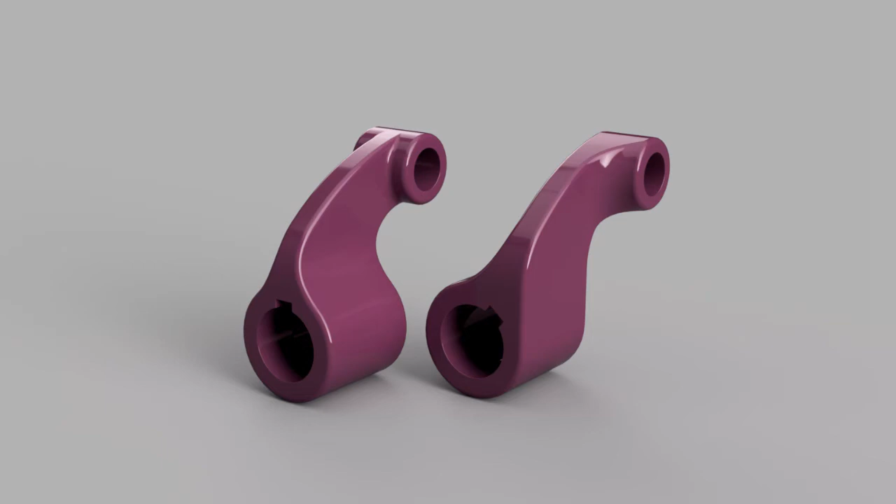Today, we are going to take up the challenge of Model Mania year 2007. Let's get started. I'm going to head up and select this plus button to create a new design. Let's grab and inspect the 2D drawing.

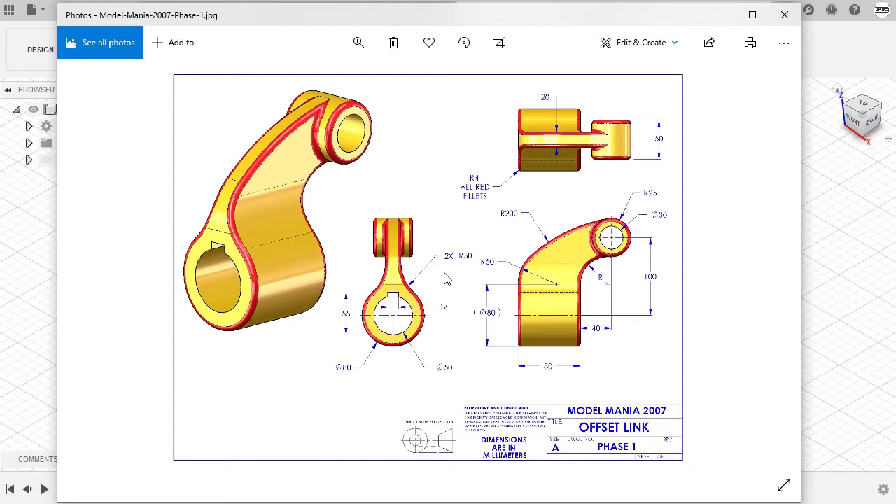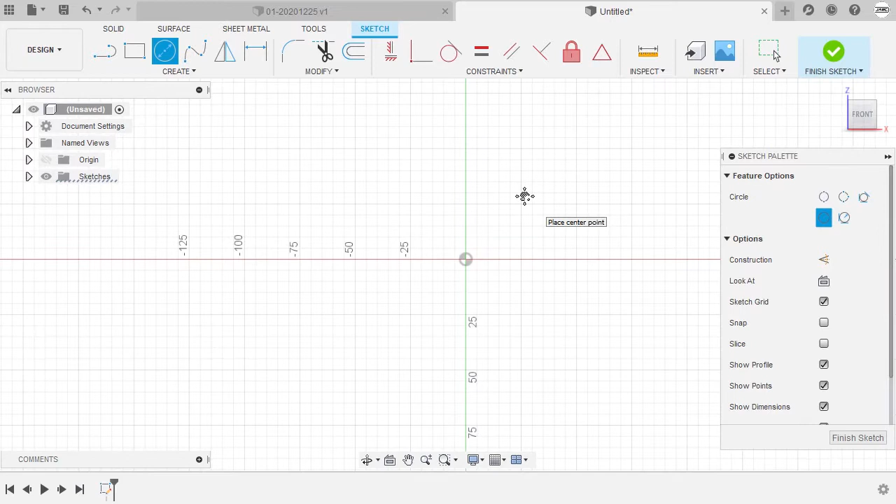Let's focus first on this feature and initially create a circle with 50 millimeters diameter. Let me hit C for circle and let's sketch on our XZ plane, selecting this. Let's drop our center point at the origin, left click. The diameter to be 50, hitting enter. Let's move the dimension here.

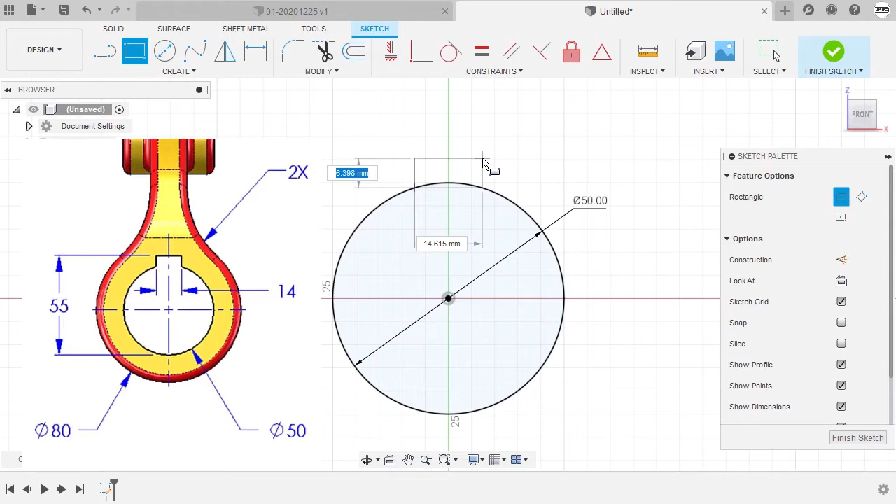Let me zoom in. Next, I'm going to hit R for rectangle and create the rectangular sketch here. And let's dimension this, hitting D for dimension, selecting these two vertical lines. The value to be 14. Let's select this top horizontal line. Next, I'm going to right click and select Pick Circle Arc Tangent.

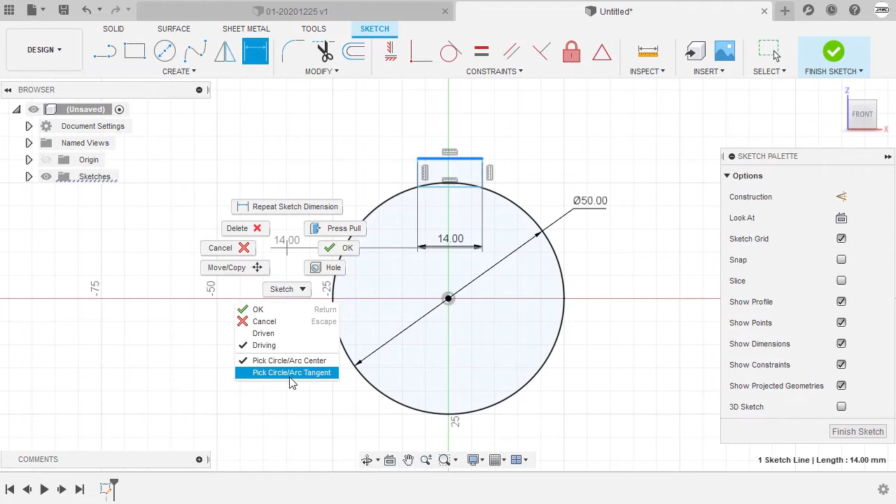I'm going to hold Shift. So notice the X mark. So once more, holding Shift, left click, and move to the left. Placing our dimension here, left click, and key in 55. Selecting enter, hitting escape.

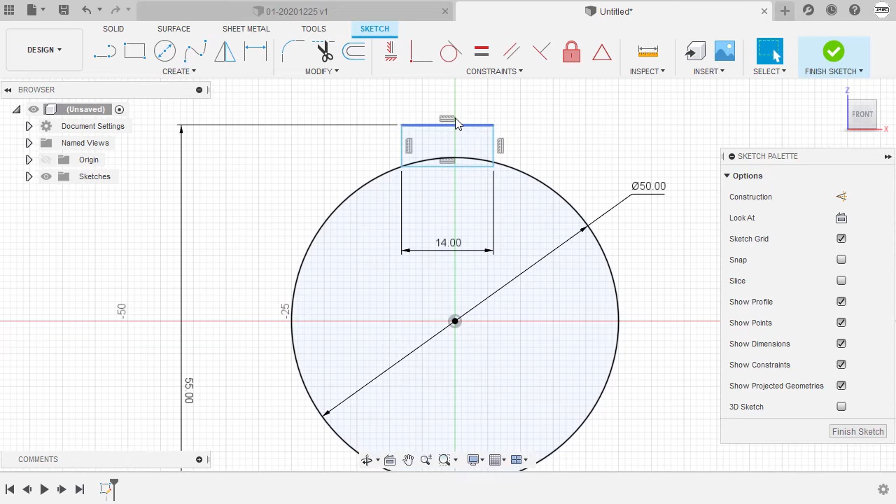Next, I would like to grab our horizontal vertical constraint, hold shift to locate the midpoint of this horizontal line, holding shift. So notice the triangle, left click. Next, I'm going to select our origin as well, left click here, hitting escape. And as a personal preference, let me turn this horizontal line into a construction line, selecting this.

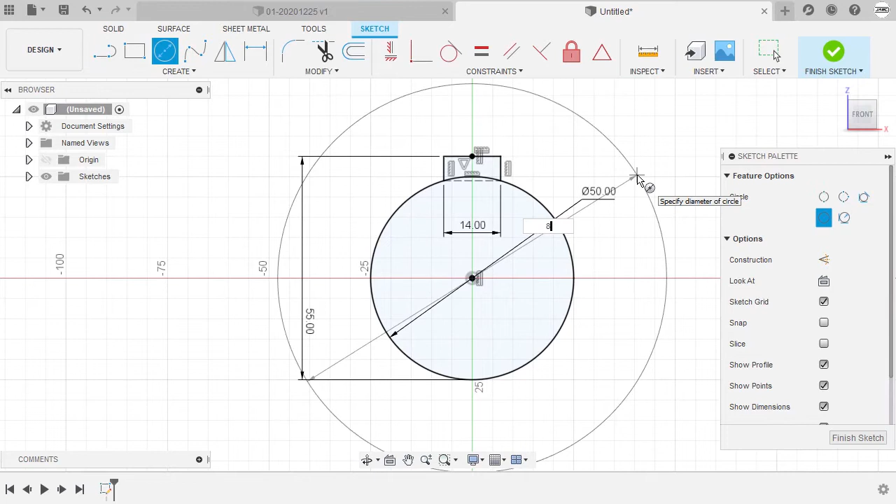And finally, let's create the 80 diameter circle, hitting C, dropping the center point at the origin, and keying in 80. Hitting enter. Let's move these dimensions over here.

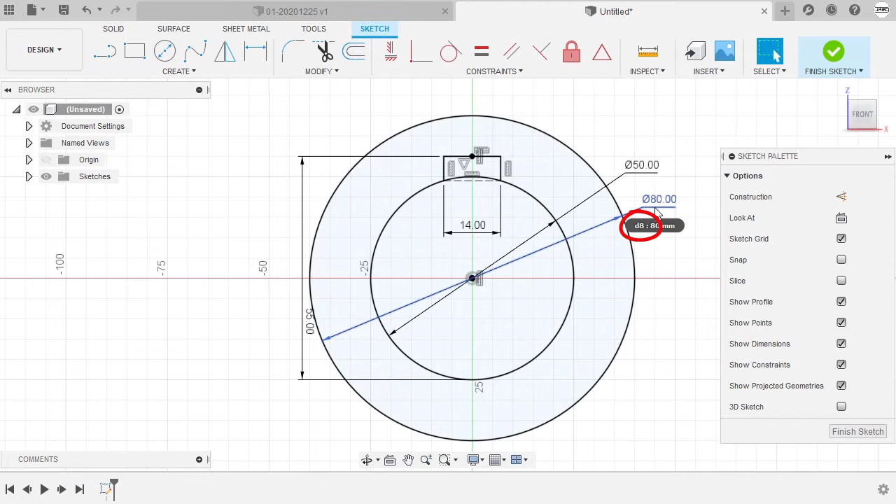Let's inspect the side view and notice the extrusion has a distance of 80. And that 80 is the same as this diameter. With that in mind, I'm going to reuse D8, which is the parameter name of this dimension. When the moment comes when we have to define the distance of the extrusion, we are going to plug in D8 for the value.

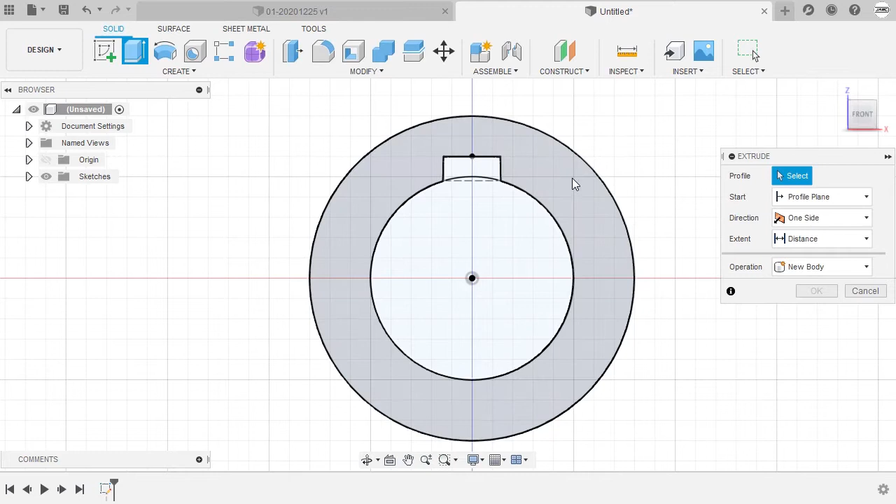Moving forward, I'm going to hit E for extrude and select this profile. And for the distance, we're going to key in D8. Inspecting, operation new body, and let's select OK.

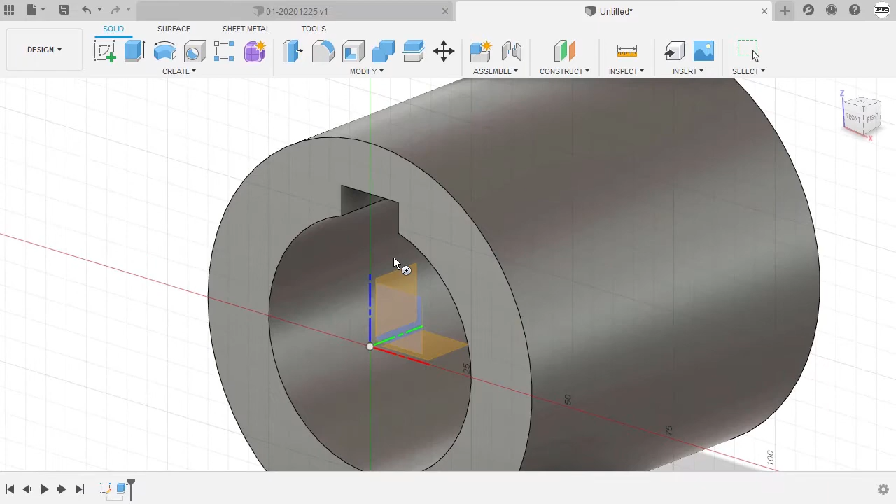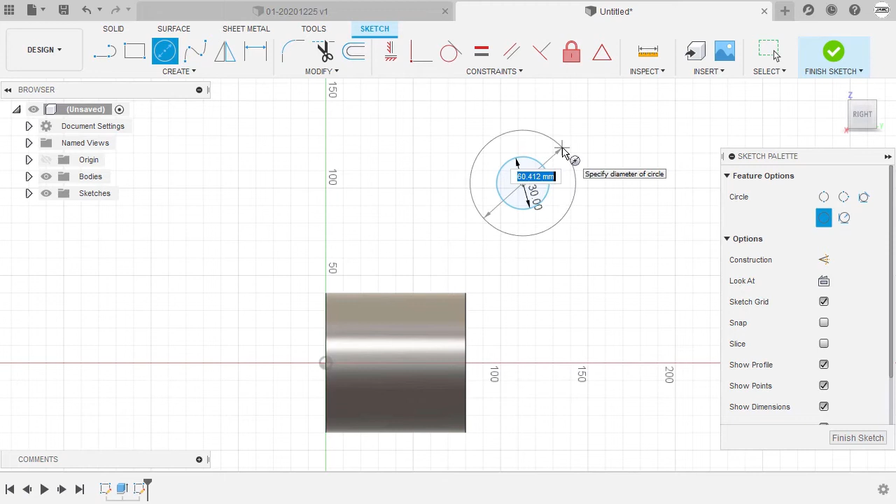Moving forward, let's sketch out this feature. Let's enter sketch mode. I'm going to hit C for circle and let's sketch on our YZ plane. Zooming out. Let's drop our center point somewhere around here. Left click. The diameter to be 30. Let's create another circle, hitting C, dropping the center point on the center point of this newly created circle. I'm going to key in 50.

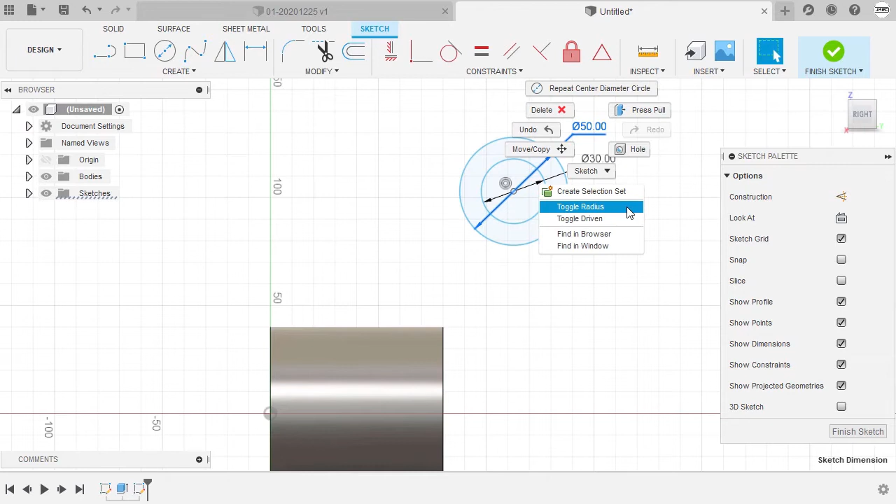Let's get these dimensions organized, moving this here and this one. In addition, we can turn this dimension into a radial dimension by selecting this, right click, and selecting toggle radius. Let's create some arcs. I'm going to hit S for shortcuts, typing ARC, selecting 3-point arc, and notice we need to have a reference for me to drop our first point.

So I'm going to hit escape, hit P for project, and under selection filter, I'm going to enable bodies. Enabling projection link as well, and selecting this body, and selecting OK. Let's grab that arc once more, hitting S for shortcuts, typing ARC, selecting 3-point arc, placing our first point at this reference, left click.

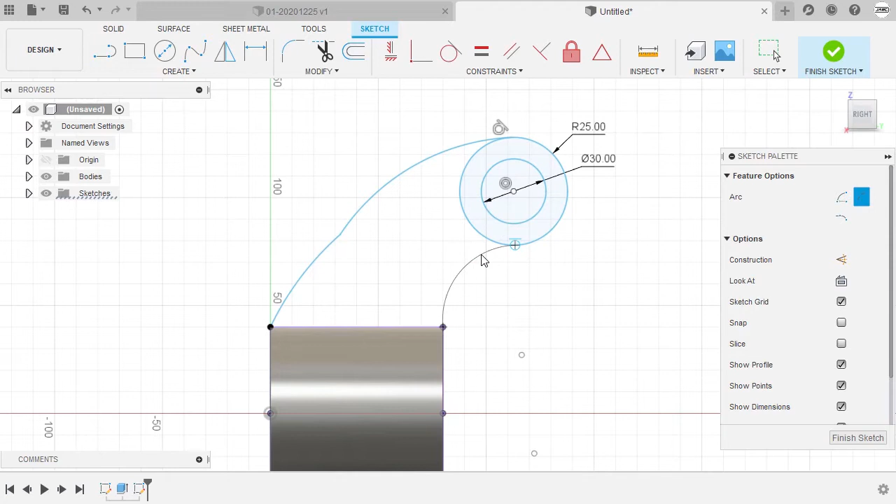Here, left click once more, creating another arc, left click, holding shift, left click at this intersection in order for us to create an inferred tangent constraint. So notice, holding shift, left click, create another arc from this point going to our circle, and left click once more, hitting escape. Next, obviously this needs a tangent constraint. Selecting tangent, selecting this arc and this arc, hitting escape.

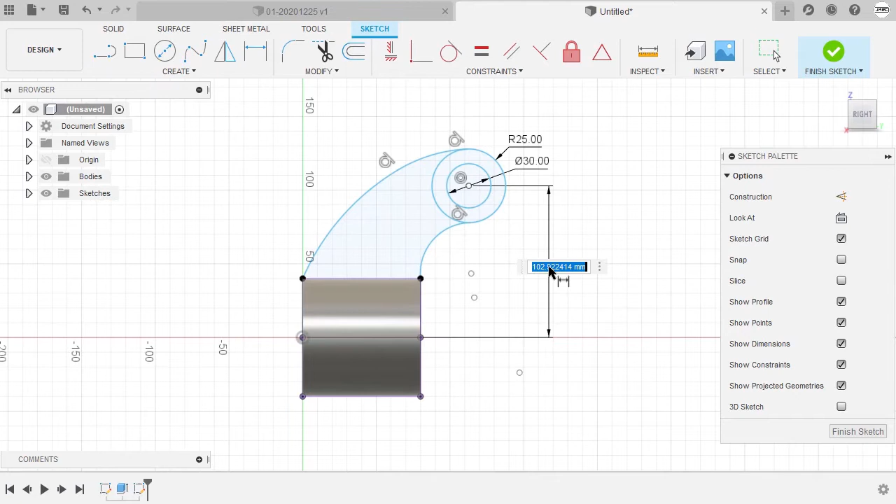Next, let's define the distance of this center point, hitting D for dimension, selecting this point and our origin, moving to the right, place our dimension here and key in 100. Next, selecting the center point once more and selecting any of this vertical edge or this point, placing our dimension here, key in 40.

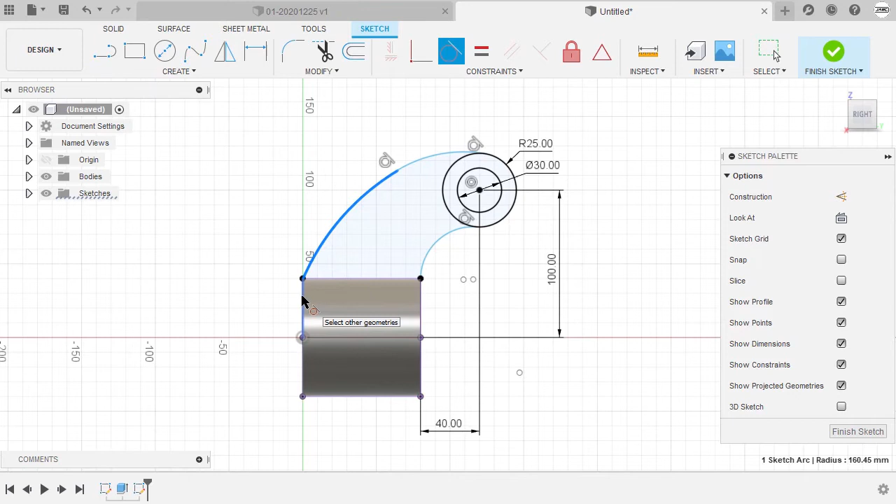In addition, this arc and this vertical line need to have a smooth transition as well. Selecting tangent, selecting this arc and this vertical projected line, hitting escape, and let's inspect. Notice the center point of this arc should be aligned as well with these points horizontally.

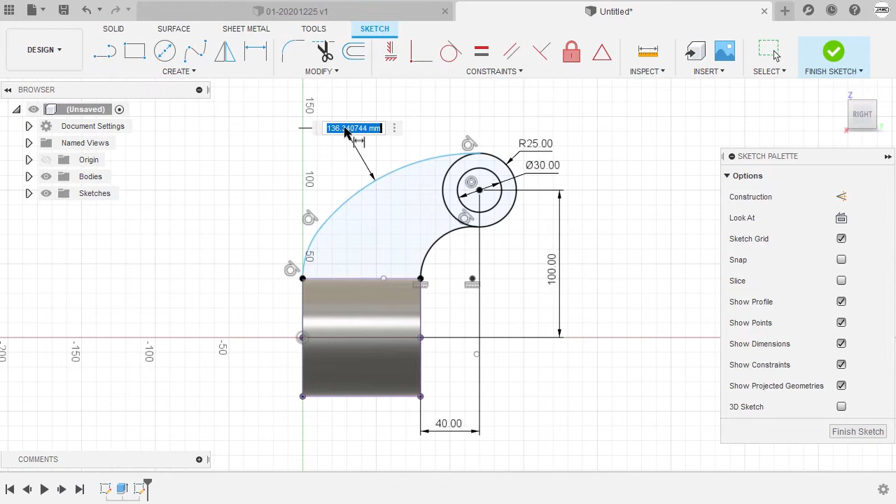So let's head over to horizontal vertical constraint, selecting any of these points and selecting this center point, hitting escape, hit D once more for dimension. Let's dimension this arc, placing the dimension here, keying in 200. Next, selecting this arc, the value to be 50. It all turned into black, meaning it's fully defined. Let's now select Finish Sketch.

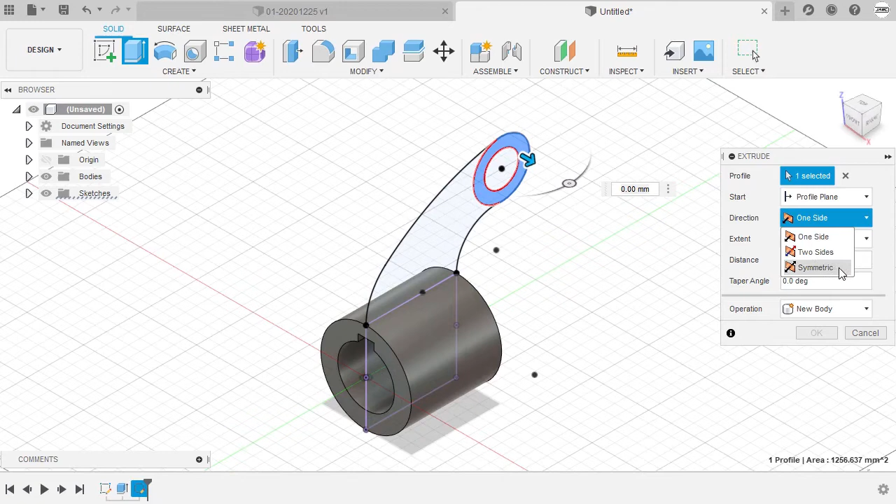Hit E for extrude, and let's select this profile. For the direction, I'm going to change this to symmetric. Pulling this, measurement to be whole length, and for the distance, we're going to key in 50. Operation New Body, selecting OK.

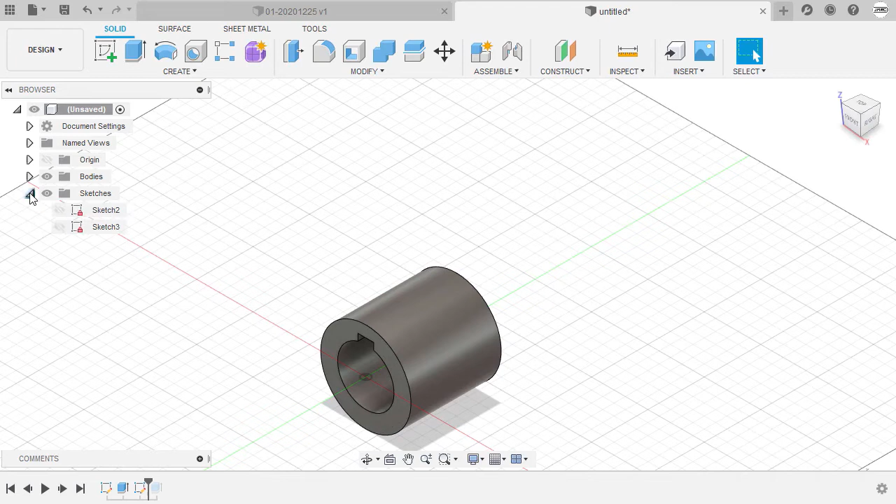In addition, I want this feature to adapt to our rib. And because of that, we need the rib to be made before this feature. And to do that, I'm going to step backward by moving our timeline marker, reveal our sketches, specifically our second sketch, hit E for extrude and select this profile.

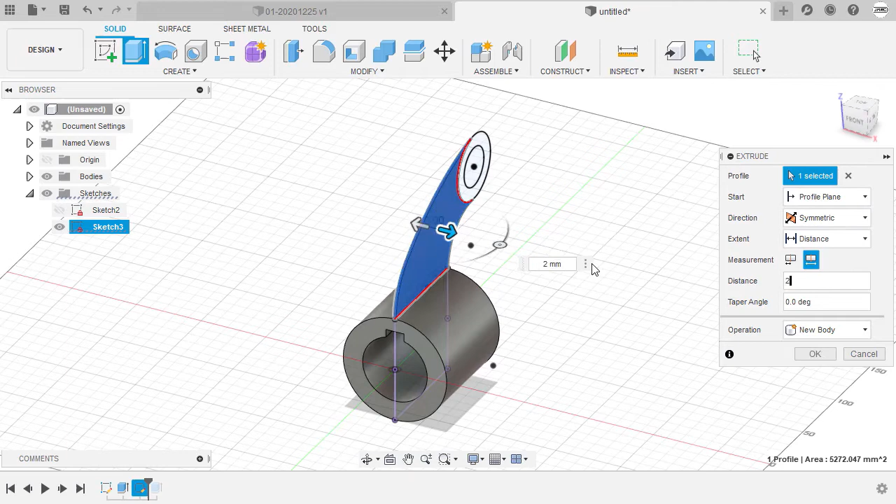Direction to be symmetric, and the thickness for this, under measurement first, let's enable whole length, the thickness to be 20. Operation should be join, selecting OK. Notice we have a gap here.

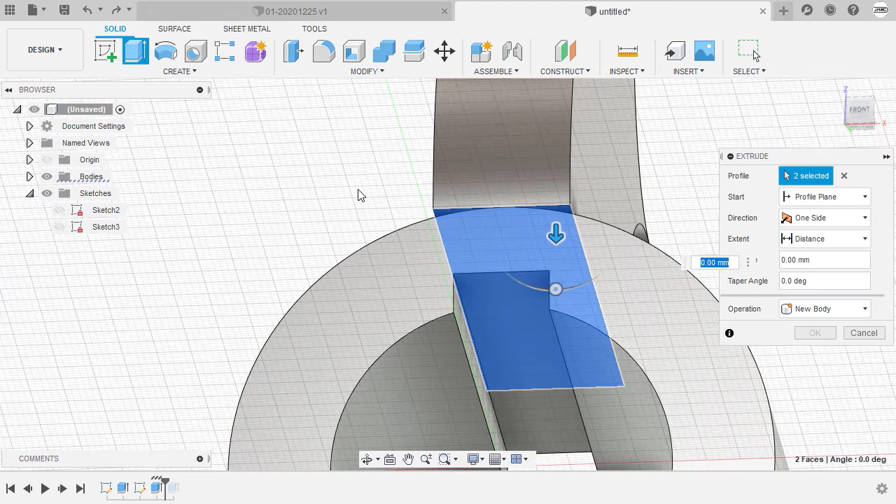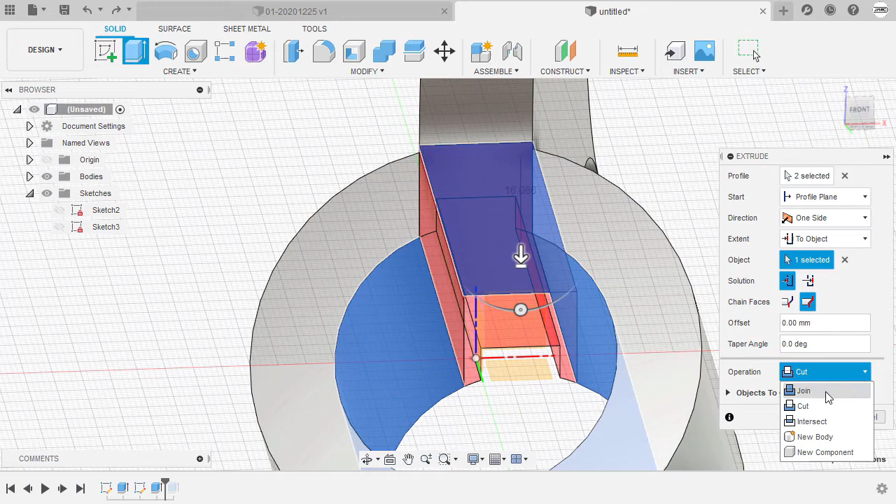To remove this gap, I'm going to select these faces, hit E for extrude, and under extent, I'm going to select to object. And for that object, it will be up to this face. And for the chain faces, I'm going to select this right option, operation to be join, and selecting OK.

Let's now move or reveal the suppressed feature by left clicking and holding, moving to the right. Let's apply the fillets on this side, hitting F, selecting this edge and this edge, the value to be 50, selecting OK. Next, let's inspect if we have created multiple bodies. Yes, we did. Our goal here is to create only one body.

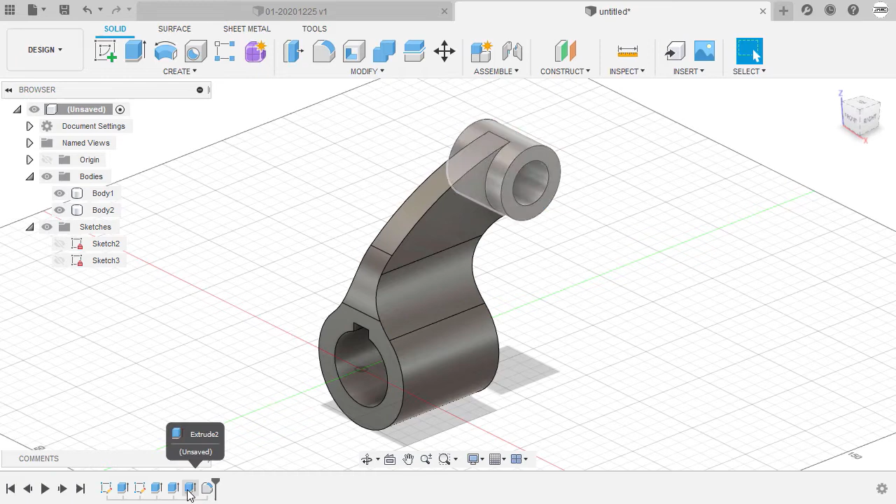So I'm going to the feature where we created this cylinder. With this selected, I'm going to right click, selecting edit feature, and under operation we're going to change this to join, selecting OK. And to finish off phase 1, I'm going to hit F for fillet, head over to select. Under selection filters, we're going to disable select all and enable body edges,

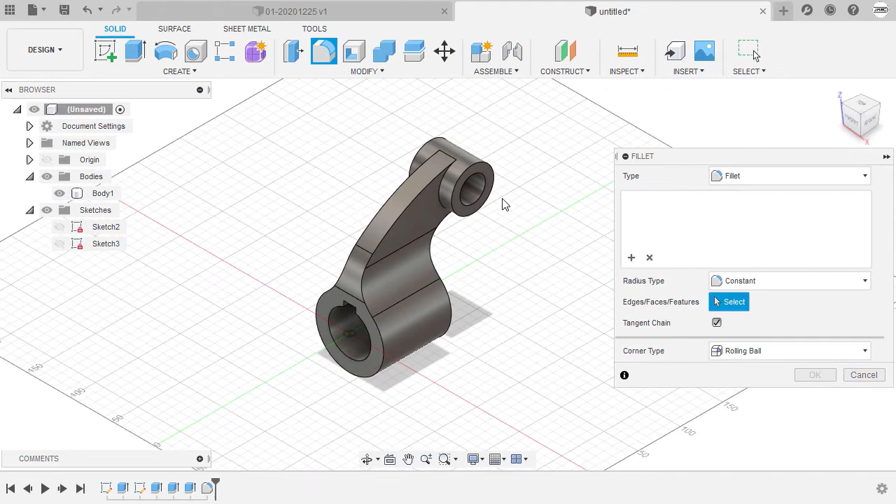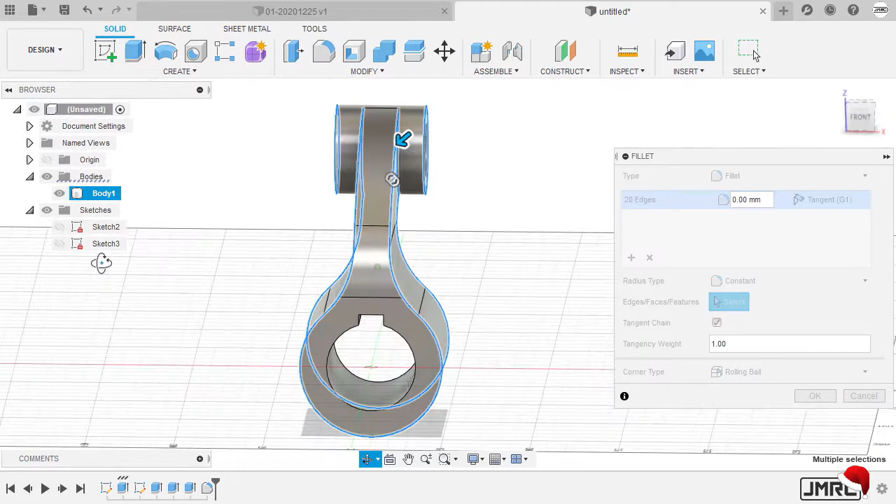creating a window selection. To select these edges, I'm going to hold Control to deselect this edge and this edge. Select these edges, specifying the value to be 4, leaving the defaults, selecting OK. Congratulations for completing phase 1.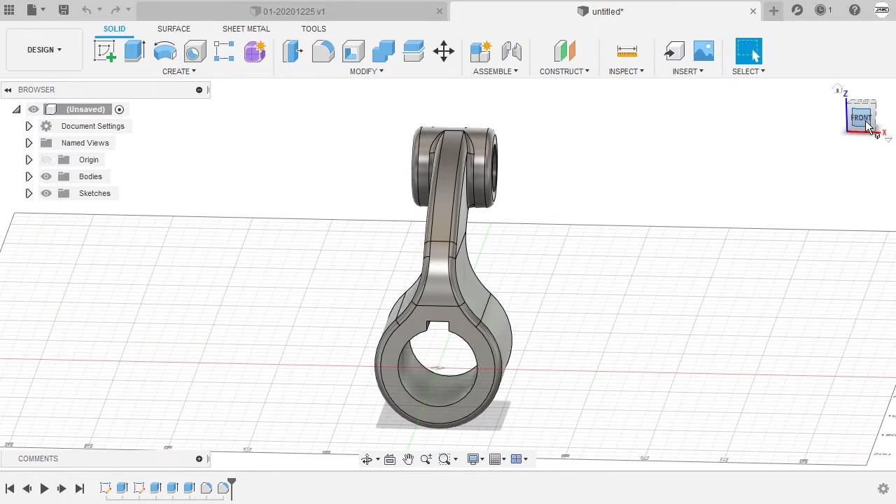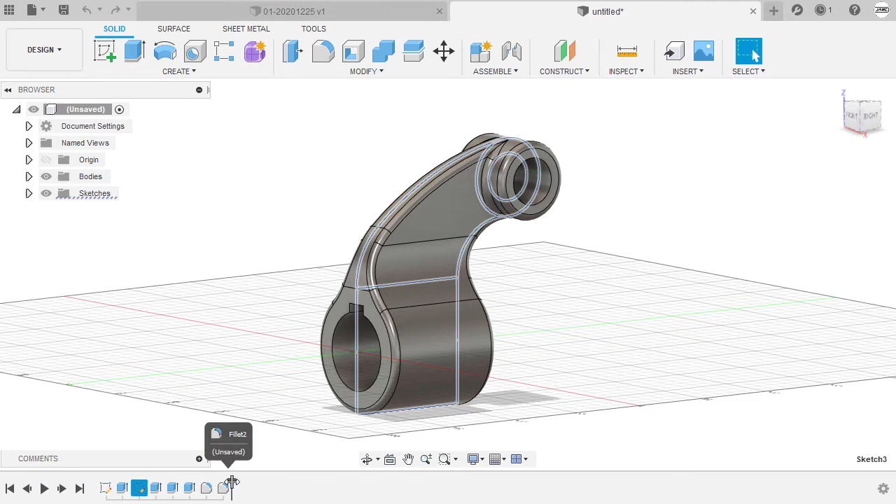Let's move over to phase 2 and notice this rib shifted to the right. Let's focus on that revision first. Recall that the sketch that created this feature is our second sketch, and this sketch was made on the YZ plane. Let's move back in time before we have created the second sketch. So I'm going to grab our timeline marker, left click and hold, and move this after extrude 1.

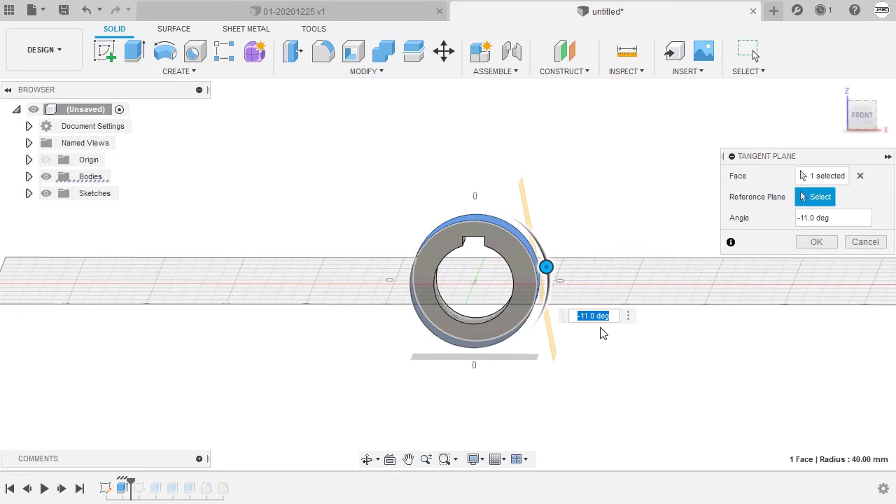Next, we're going to create a new sketch. So I'm going to head up to construct and select tangent plane. And for the target face, it will be this cylindrical face. Notice the plane is at our desired position. And just to make sure, I'm going to key in 0 and selecting OK. Let's move forward by selecting next step.

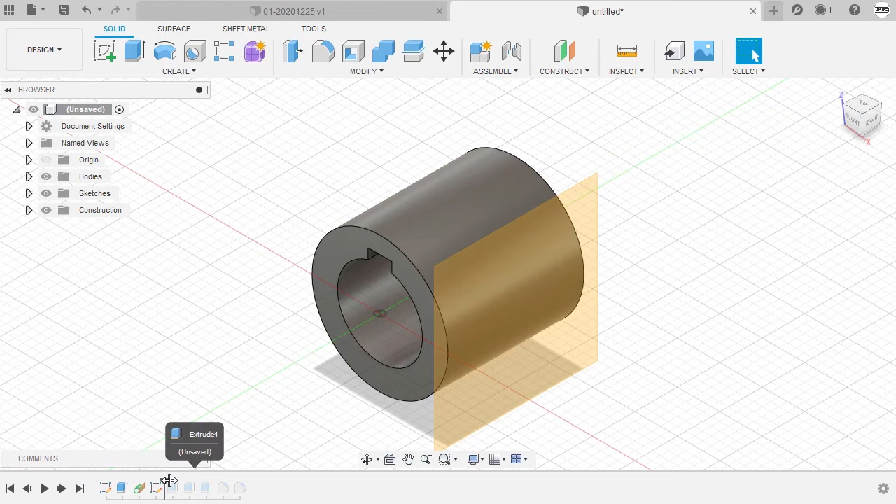Head over to our second sketch, right click and select redefine sketch plane. Our new plane will be this newly created construction plane. Selecting this, selecting OK. Let's move one step. Let me head over to front view. And notice we need to shift the other half of this rib to the left.

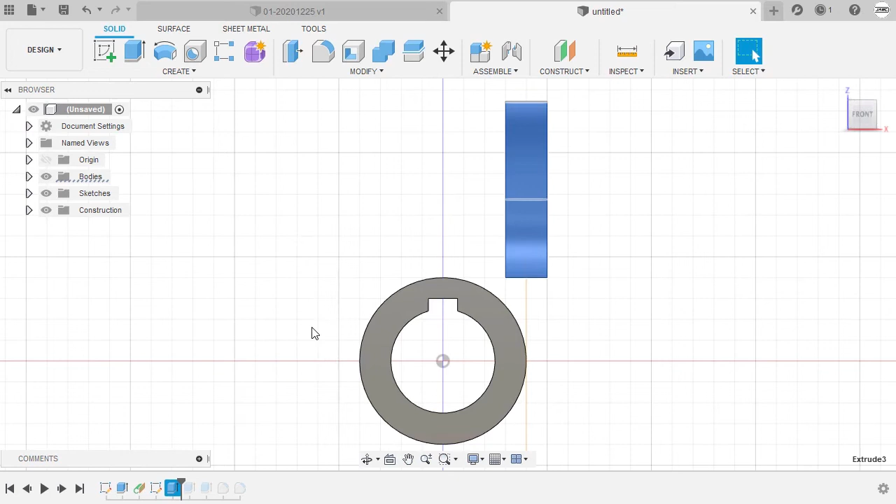Let's head over to this feature at the timeline. Selecting this, right click and select edit feature. Let's change the direction to one side. And we need to go in a negative direction. So I'm going to type in negative at the front. Operation join, selecting OK. Let's move one step once more.

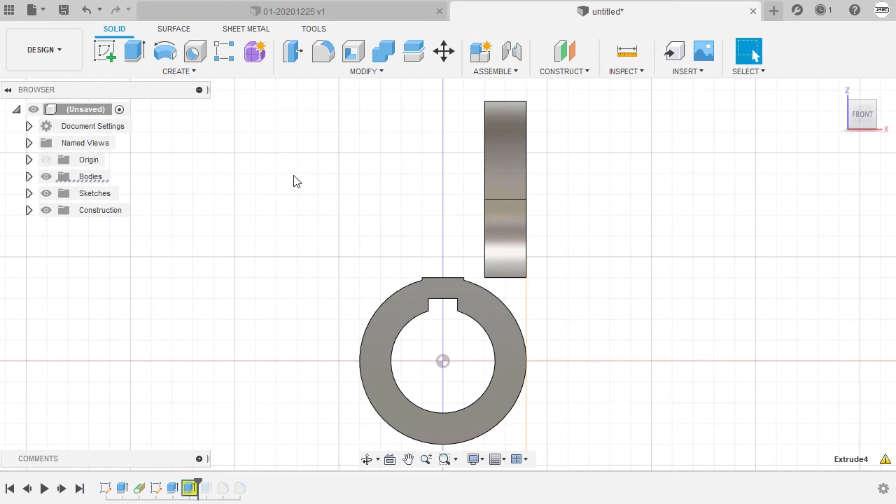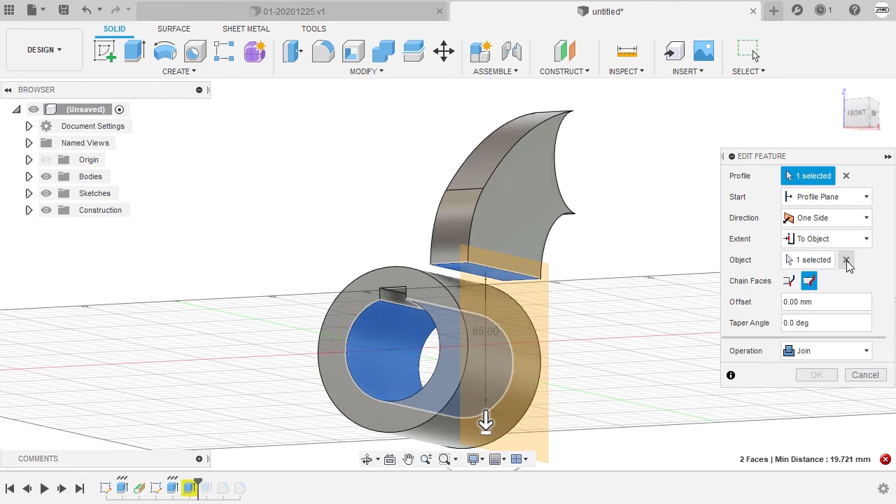And notice we have an error. So I'm going to select this extrusion, right click and select edit feature. The intent of this extrusion is to fill in the gap between these two bodies. So we are going to redefine. I'm going to head over to object and remove the current selection by selecting this X mark.

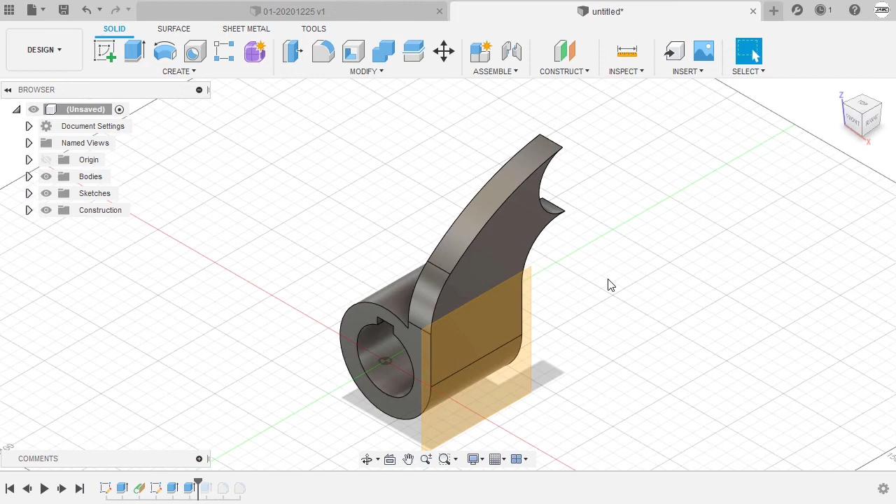And for our new object, it will be this cylindrical face. Solution to be minimum, chain faces to be chain faces. Operation join, selecting OK. Let's move one step once more. Let's redefine this feature, selecting this, right click and selecting edit feature. For the direction, I'm going to change this to two sides.

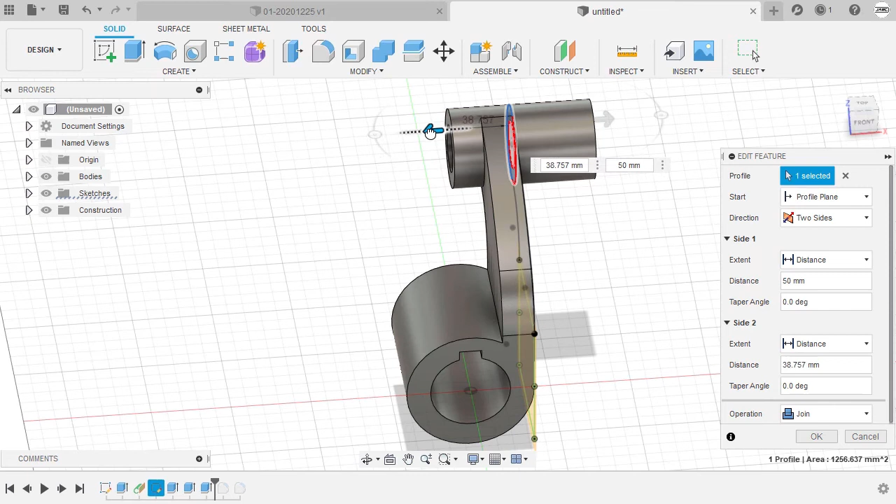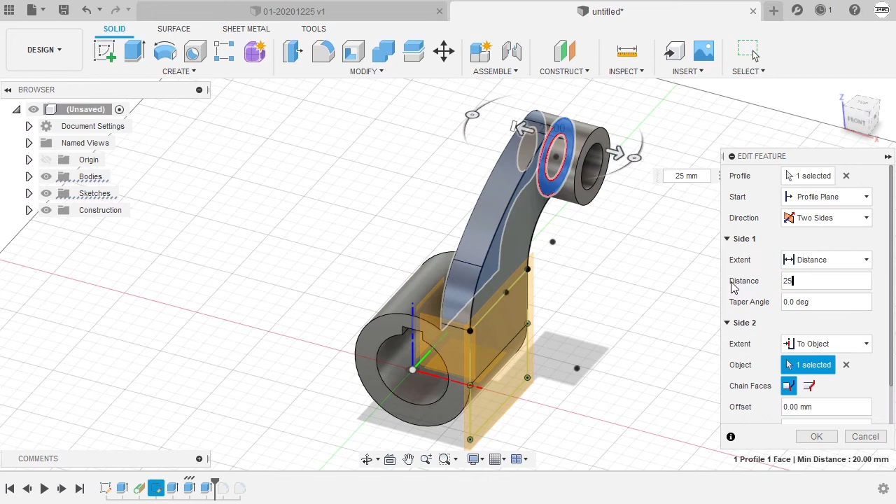The first side, so notice as I am moving this, side 2 is also updating, which means this arrow pertains to side 2. For side 2's extent, I'm going to select to object, and that would be up to this rib's face. And notice at the 2D drawing, we have a fillet here at 25. So for side 1, the distance would be 25. Let's now select OK.

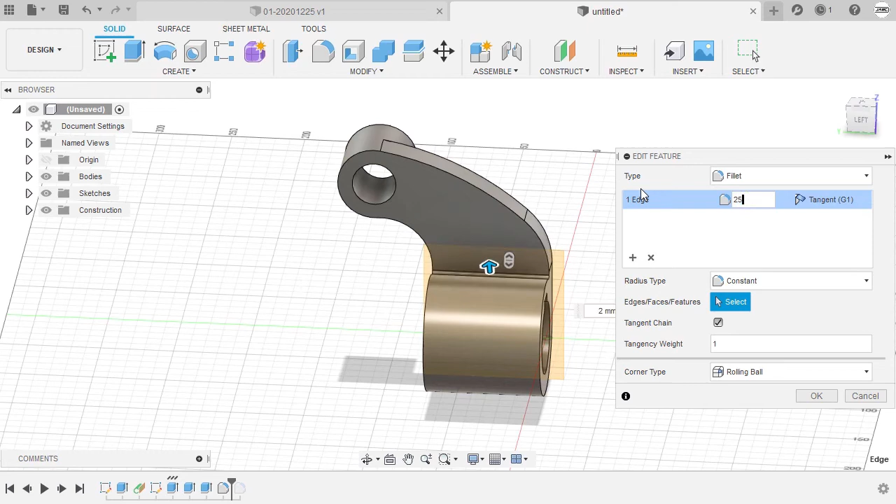Let's move one step forward to our first fillet. And let's redefine its value. Right click, selecting edit feature, and I'm going to key in 25. But notice here, this is a difference between SOLIDWORKS and Fusion 360. The transition doesn't go smoothly on this area.

But notice as I decrease the fillet's radius, as it reaches around 20, it's still okay. But when I go beyond 20, like 21, notice here it doesn't smoothly transition. So take note of this difference between SOLIDWORKS and Fusion 360. So I'm just going to key in here instead of 25 to be 20. Selecting OK.

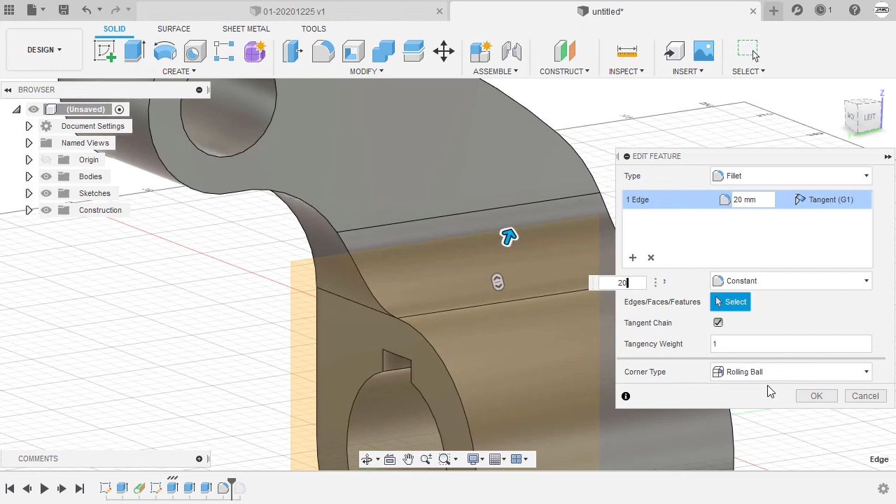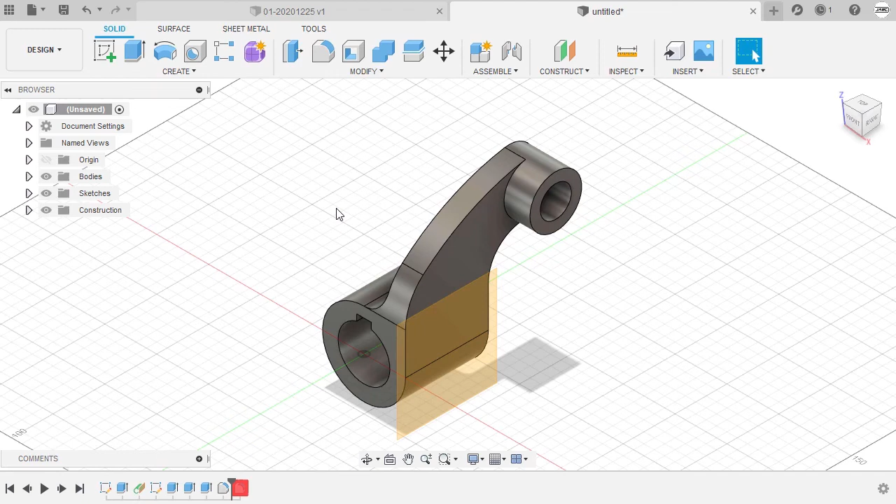Let's move forward and reveal the final feature. And notice here we have an error. Instead of editing this feature, I'm just going to cancel this out, suppress this feature, and instead create a new fillet. So that is just a personal preference for me. Hitting F. Let's add the fillet first for this edge, which is 25. Selecting OK. Hit F once more.

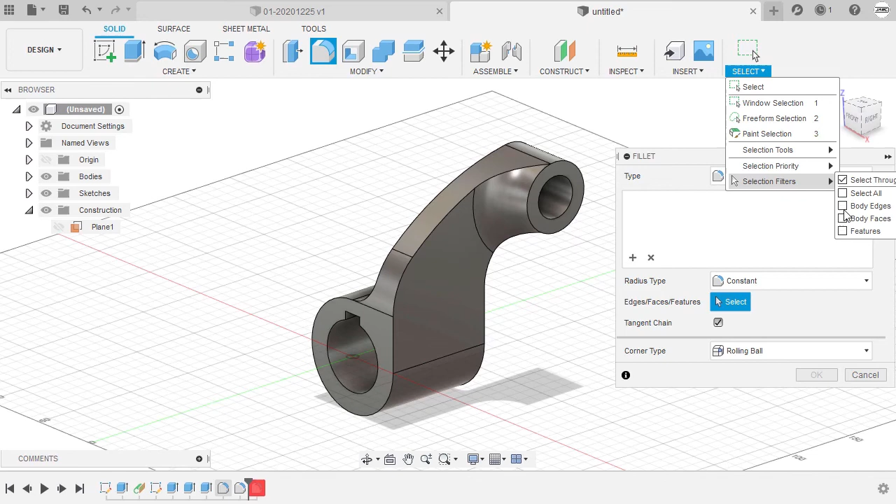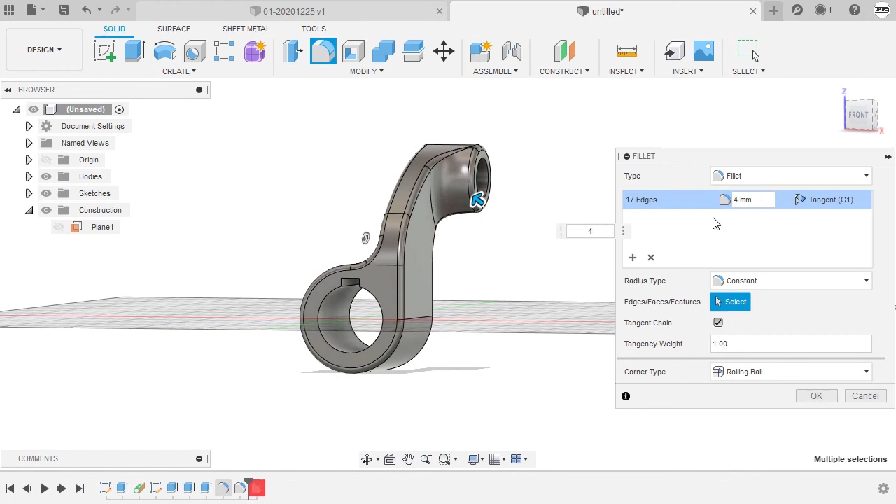Head over to select. Under selection filters, let's disable select all, enable body edges, creating a window selection, holding Control and left clicking to deselect these edges, inputting the radius to be 4, leaving the defaults and selecting OK. Let's inspect.

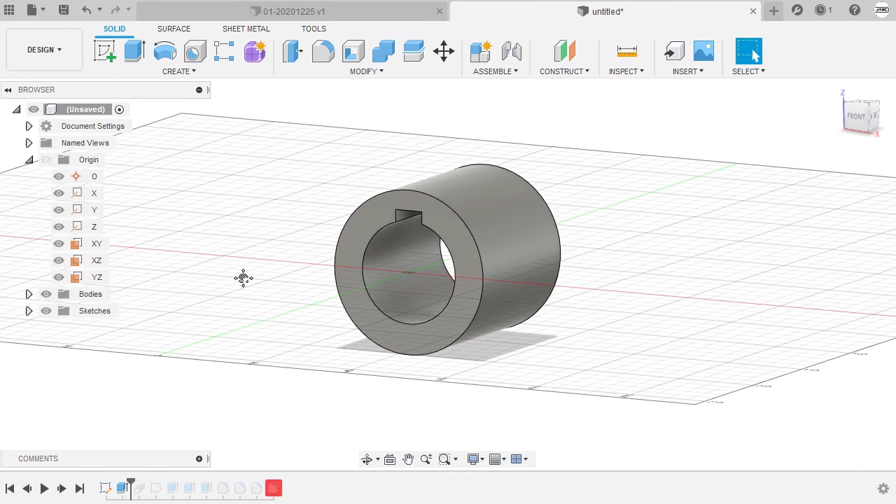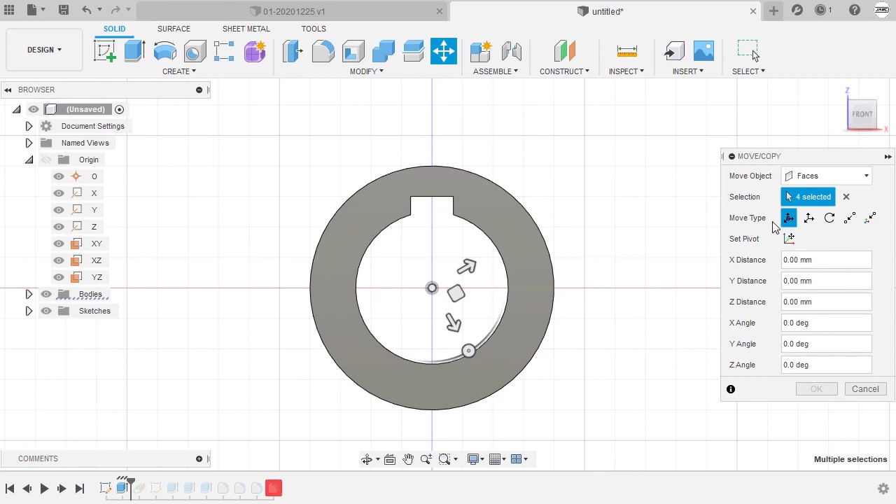And finally, for this feature, let's go back in time after our first extrusion. Next, I'm going to select all of these faces. Next, I'm going to hit M for move. So notice I am moving faces, heading to front view. And for the move type, let me change this to rotate instead. For the axis, I'm going to select our Y axis.

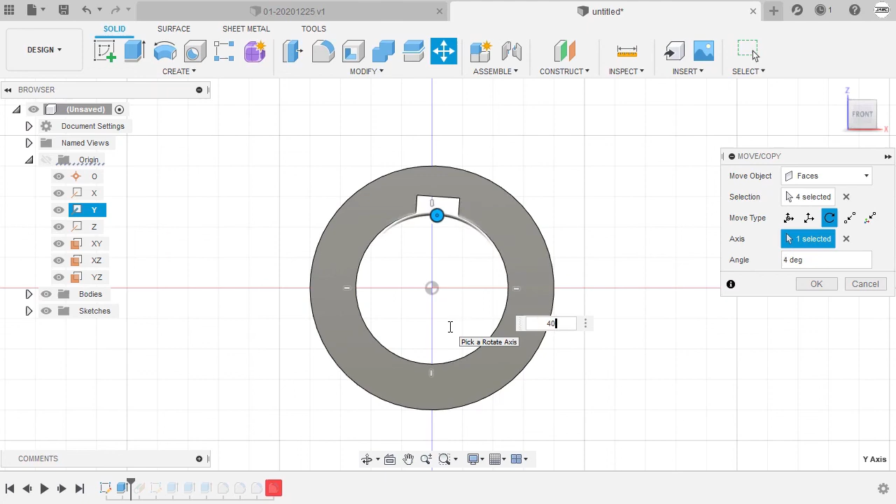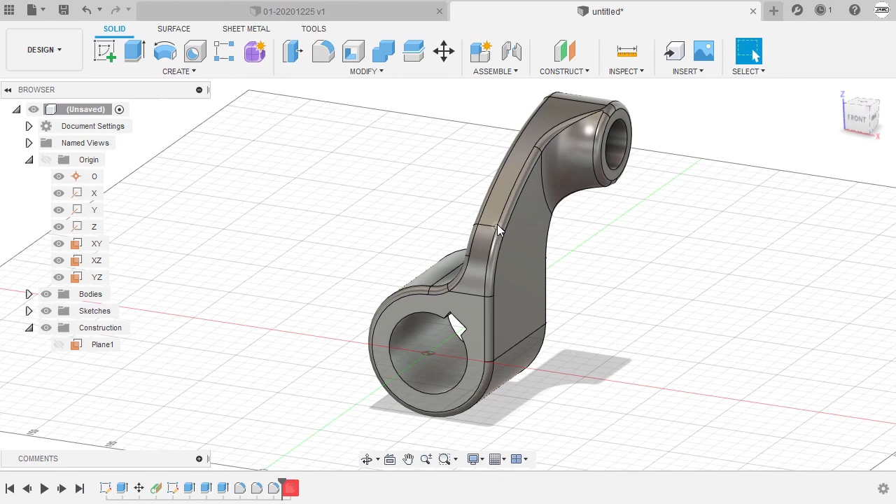Next, let me grab this rotate handle and key in 40. Selecting OK. And from here, let's grab our marker once more and revert back. And that's one of the cool features in Fusion 360, the move copy command. In addition, I can also use that command in order for us to move this rib to the right. Congratulations for completing phase 2 of this Model Mania 2007 challenge.